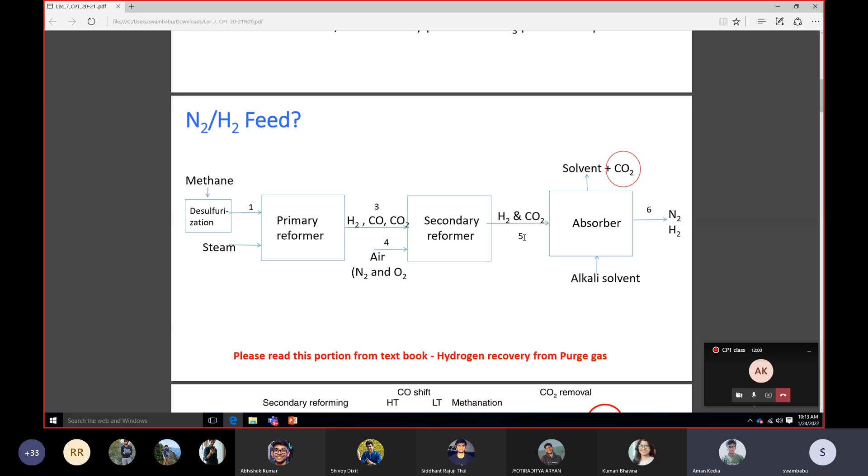Because we can easily recover CO2 from the alkali solvents. So if for some reasons you want hydrogen gas as a fuel, you can recover this hydrogen from stream 6, because in the current generation, especially in the last 6 months or so, Government of India is highly focusing on hydrogen fuels. Even abroad, many countries like Australia, Europe, America are only using hydrogen-based fuels, starting from street lamps to almost big usages. So if you want to recover hydrogen from stream 6, we can use certain adsorption processes, and in the textbook which I gave you, the details are given. You may please read the hydrogen recovery from the purge gases, or stream 6.

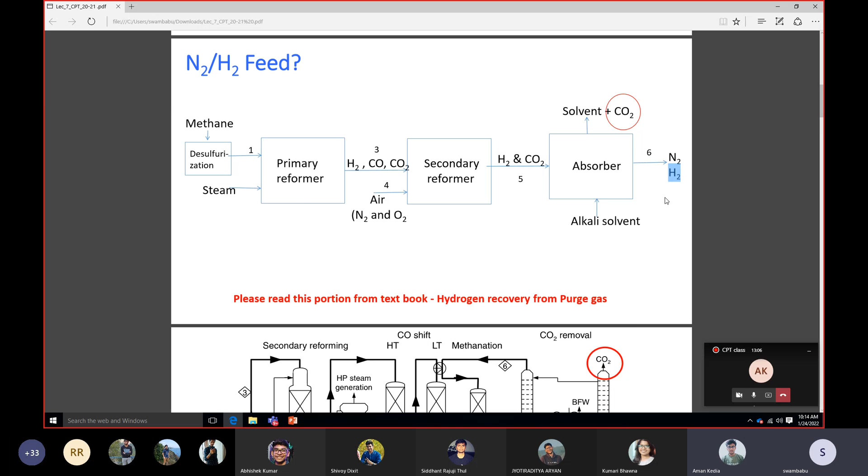So this is the overall process starting from natural gas reforming to the final ammonia production that this flow sheet contains. Natural gas, you can see the bottommost stream goes in, this is stream number 1. The first one is desulfurization taking place. Then it goes to the primary reformer, then to the secondary reforming section. After that, we have the CO2 removal. Then whatever nitrogen and hydrogen is coming, that goes to the reactor, then recycled. So this is whatever explained in bits and pieces, all together given as this flow sheet. You may get confused if you see the big flow sheet, but I have already explained it in small pieces. If you understand that, that will be sufficient to understand this.

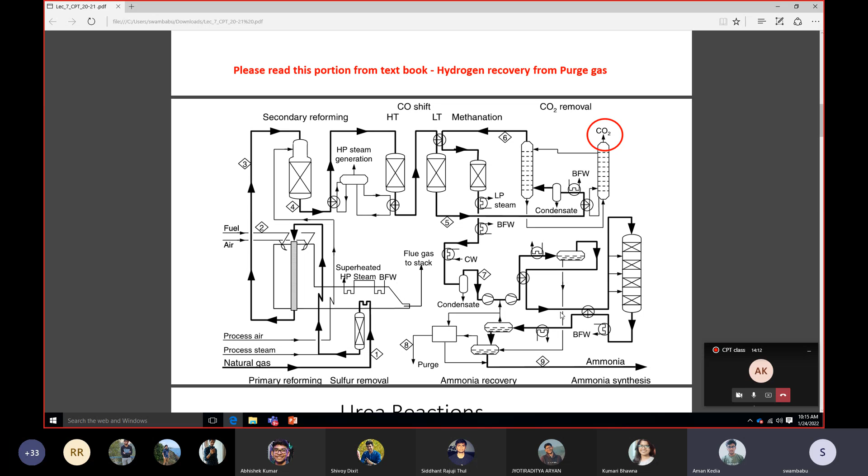So today I'll move on to the urea production. Today we'll move on to urea production. I'm sure you already know the basic chemistry behind urea.

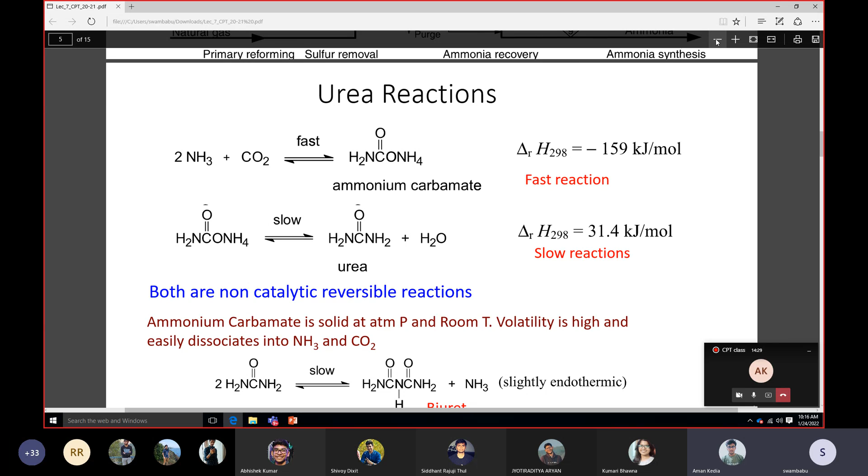In urea production, there are two reactions. In the first reaction, 2 moles of ammonia reacts with carbon dioxide, which is a very fast, almost quick reaction, and converts to ammonium carbamate. This is an exothermic reaction.

In the last class, I explained that whenever we have an exothermic reaction, if it is a catalytic reaction, we need very high temperatures, like above 500 Kelvin. If it is not a catalytic reaction, we don't need to go to high temperatures like 500 Kelvin or 700 Kelvin. Why do we need high temperatures for catalytic reactions? Any guess from the students? I mentioned this in the last class, but I just want to see whether anyone understood or not. To activate the catalyst - very good. To activate the catalyst, we have to operate at high temperature.

I have also given two other reasons why we cannot use ammonium carbamate as a fertilizer. Please understand: this is a fast reaction, this is a slow reaction. Ammonium carbamate dissociates into ammonia and CO2 at normal pressure and temperature conditions because it is highly volatile.

Now, there is another possible side reaction. Ammonium carbamate can convert to urea and water, but there's also another possible side reaction where urea converts to biuret and ammonia. This is also an endothermic reaction.

We want the second reaction to happen - we want urea formation. We don't want this side reaction to happen. We want the first reaction to happen, but we don't want the backward reaction to happen. So what is to be done?

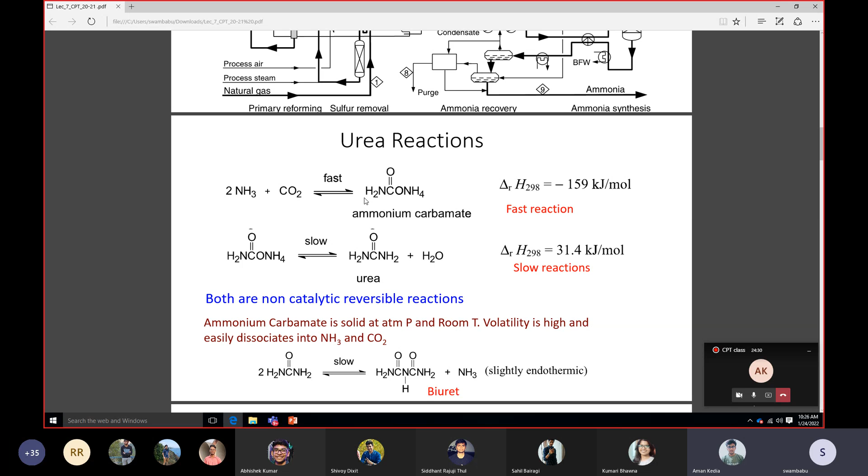In the urea reactor, we should avoid the backward reaction of the first reaction - that is, we don't want dissociation of ammonium carbamate into ammonia and CO2. We want the forward reaction of the second reaction - ammonium carbamate converting into urea and water. Again, we don't want urea converting into biuret formation. So how to deal with this?

Before this, the question comes: can we use ammonium carbamate as fertilizer? The answer is no. Why? It is a volatile component and it releases heat. If you put ammonium carbamate as a fertilizer, rather than being utilized, it will burn the plants, because it's highly volatile, dissociates into ammonia and CO2, and releases heat that burns the plants.

What are the other problems with ammonium carbamate? As I said, the first reaction needs to be operated at low temperatures because high temperatures favor the backward reaction.

What problem happens if you operate at low temperatures? Ammonium carbamate is a solid at atmospheric pressure and room temperature. It tends to form as a film if you operate the reactor below its melting point temperature.

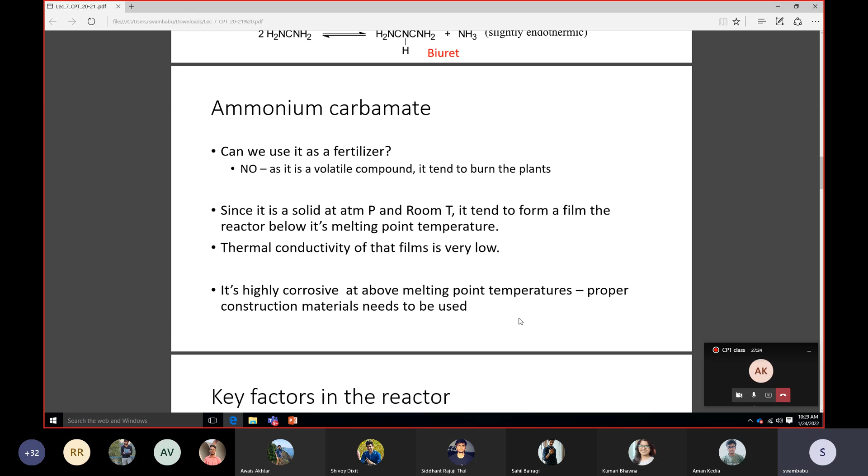So these are the solutions to these problems. The ammonium carbamate reaction, the first reaction, although favorable at low temperatures, cannot be operated at very low temperatures because ammonium carbamate tends to form a film. The thermal conductivity of that film is very low, so it will not be possible to do intermediate cooling. If you operate at high temperatures, two problems arise: the backward reaction is favored, and at the same time ammonium carbamate can be highly corrosive. So there has to be an optimum temperature.

That optimum temperature needs to be run for the urea reactions. So how do we find out the optimum temperature? Again, we'll go back to the thermodynamics study to find it out.

So the key factor to be maintained in the reactor is to avoid the dissociation of ammonium carbamate. To avoid the dissociation of ammonium carbamate, the reactor needs to be operated at high pressure.

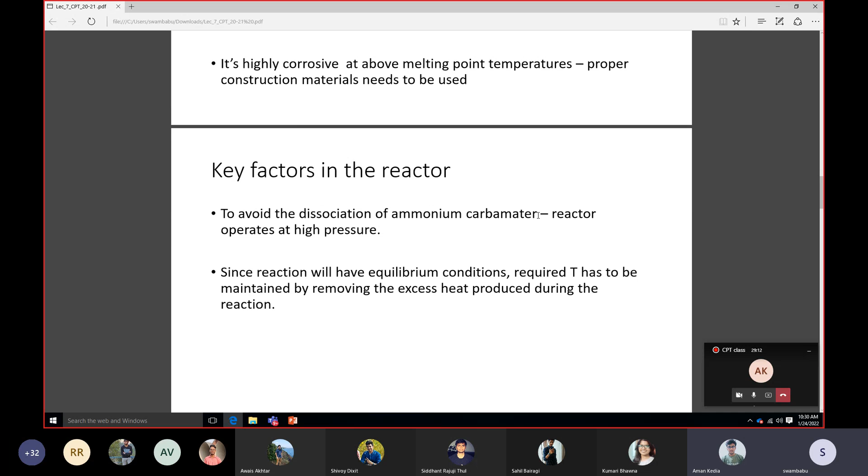Since the reaction has equilibrium conditions, where at high temperature the backward reaction is favored, we need to remove the excess heat produced during the reaction, as already discussed.

So this is from the kinetics point of view. I think first we will see this, the thermodynamic point of view. CO2 conversion in the liquid phase, where ammonia reacts with CO2, both happening in the liquid phase.

Now you can see that the optimum temperature is around 190 to 200 degrees. We cannot operate below 160 because the conversion will be very low. Again, we cannot operate above 210 degrees centigrade because the backward reaction is favored.

This is from the thermodynamic equilibrium studies, which clearly indicate that it is ideal to use between 190 to 200, but we can use between 170 to 200 conditions. So normal urea reactors operate between 170 to 200 degrees centigrade, and at this range, the approximate CO2 conversion achieved is around 70%.

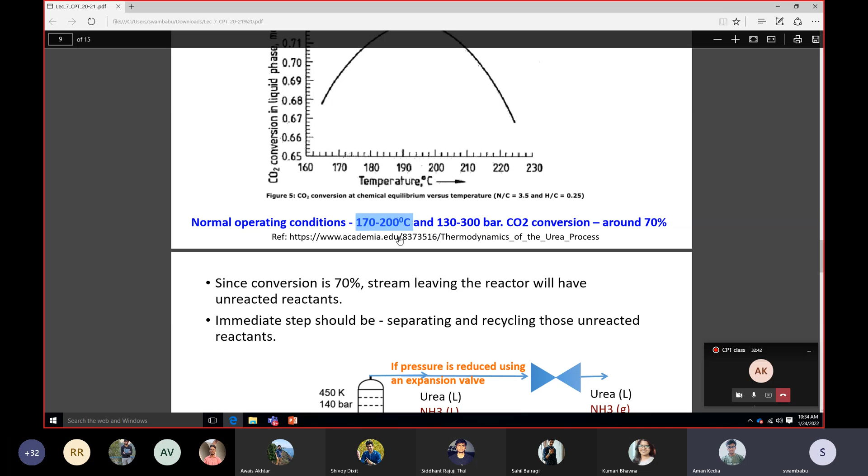So even from this graph, the favorable conditions are again 170 to 200 degrees. Even from CO2 conversion to ammonium carbamate and carbamate to urea, both show that the normal operating temperature has to be 170 to 200 degrees centigrade. Close to 200 is always better.

And to avoid the dissociation of ammonium carbamate back to ammonia and CO2, we need to run at high pressures. So we operate at 130 to 300 bar pressure.

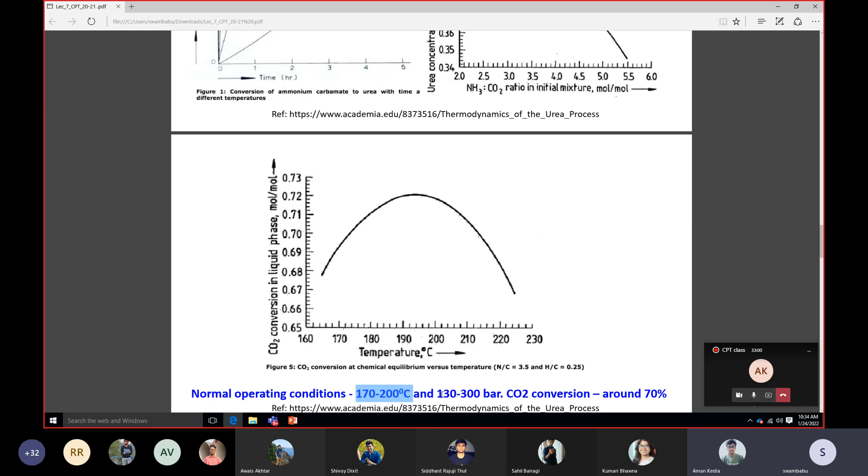Now, at what ratio? Ideally, from the reactions, we wanted a 2:1 ratio. Now, which is the limiting reactant here? CO2 is the limiting reactant. Usually in the urea reaction, CO2 conversion limits the reaction.

So now, if you want to avoid the backward reaction, what do we have to do? Can anyone guess? If I increase the mole ratio or decrease the mole ratio, I can avoid the backward reaction.

Let me say, here we need a 2:1 ratio, but usually we operate at higher ratios. NH3 to CO2 stoichiometric required ratio is 2, but we operate slightly higher, at around 3. The reason is if I maintain ammonia in excess,

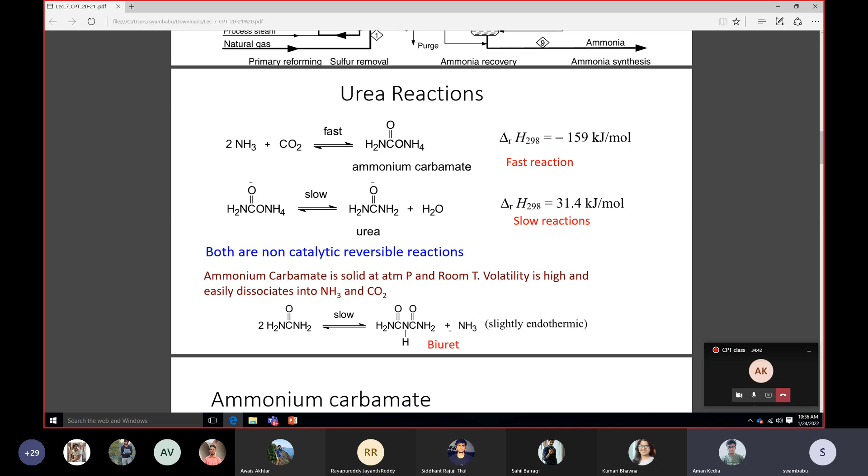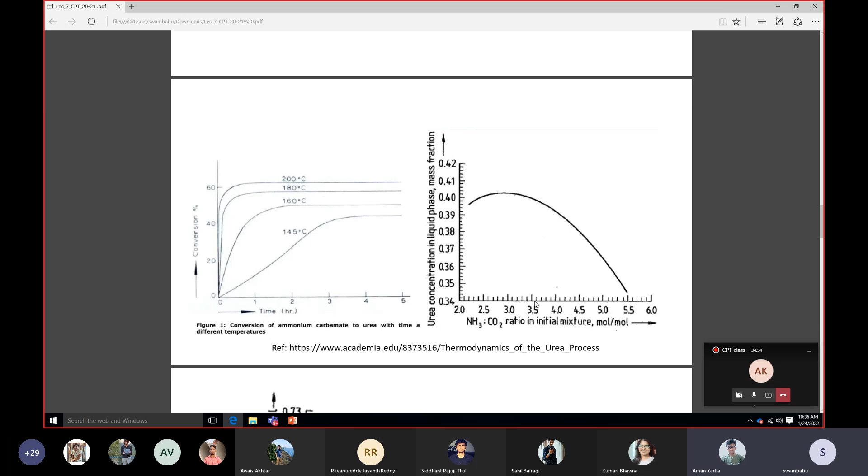I can avoid the backward reaction. Also, I can avoid this biuret formation. So that is the reason another important thing we do: we input more amount of ammonia than the stoichiometrically required ammonia.

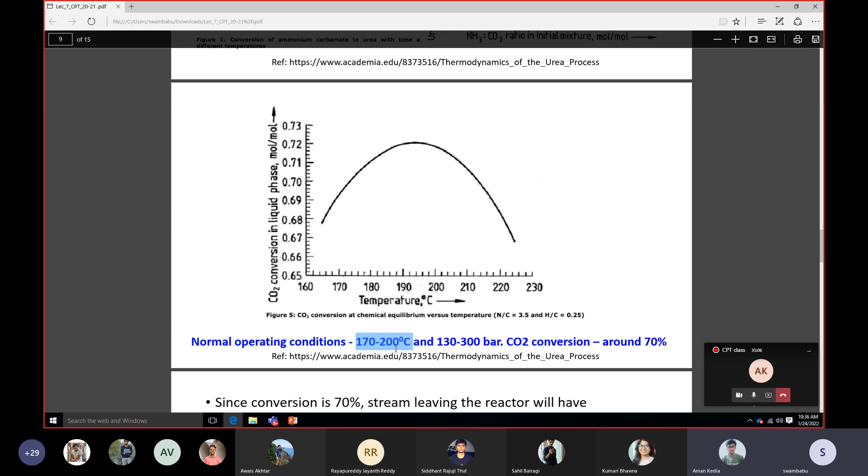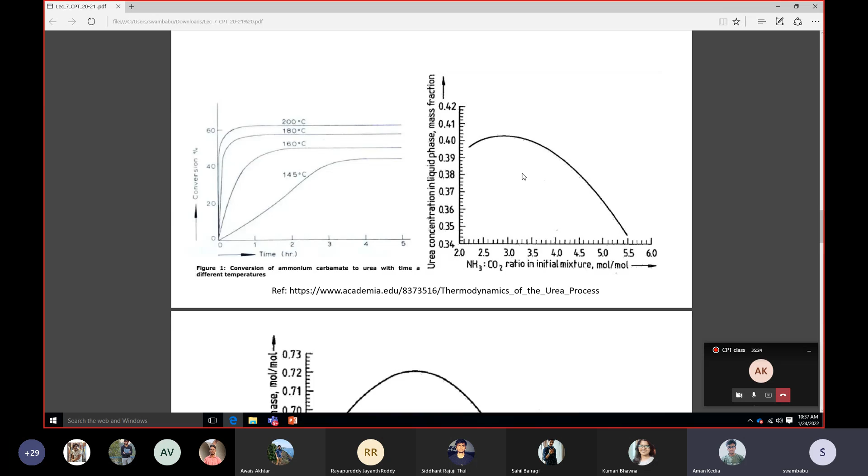So from thermodynamics and kinetics point of view, we need to operate at 170 to 200 degrees centigrade and at high pressure, and to avoid biuret formation and push the first reaction in the forward direction, we supply slightly excess ammonia than the stoichiometrically required amount. I hope students were able to understand.

Since there are no comments, I assume you all were able to understand.

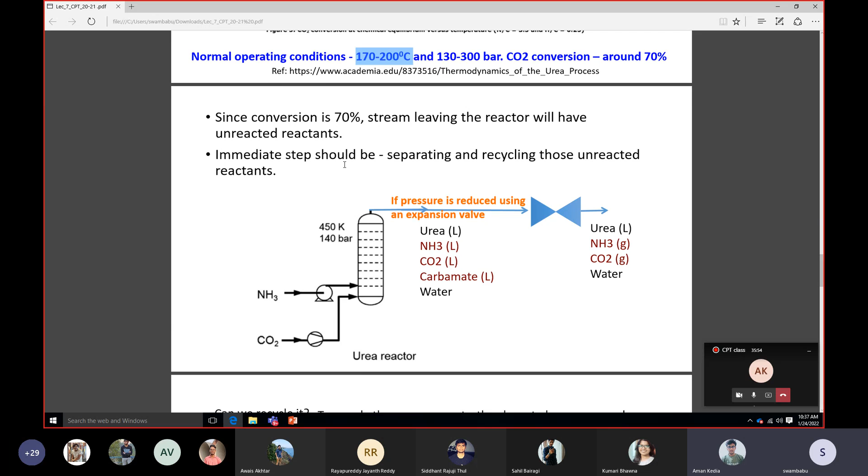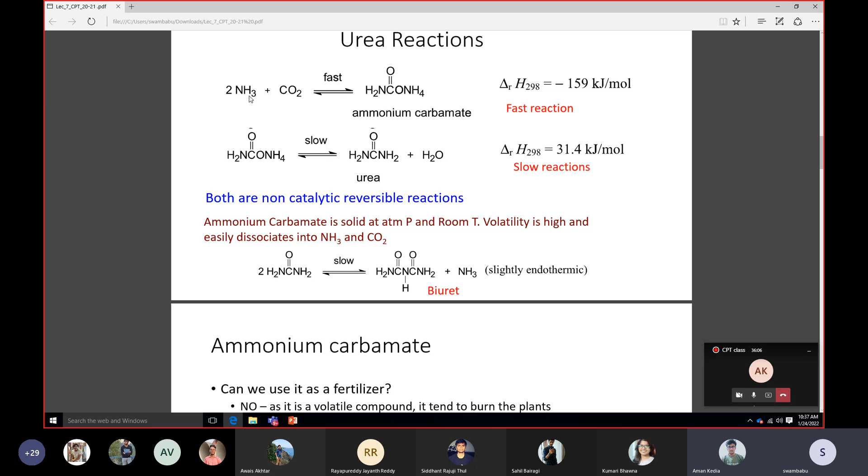Now, as we can see, this is a non-catalytic reaction. This is a liquid phase reaction. Ammonia and CO2 are liquefied before we send them to the reactor.

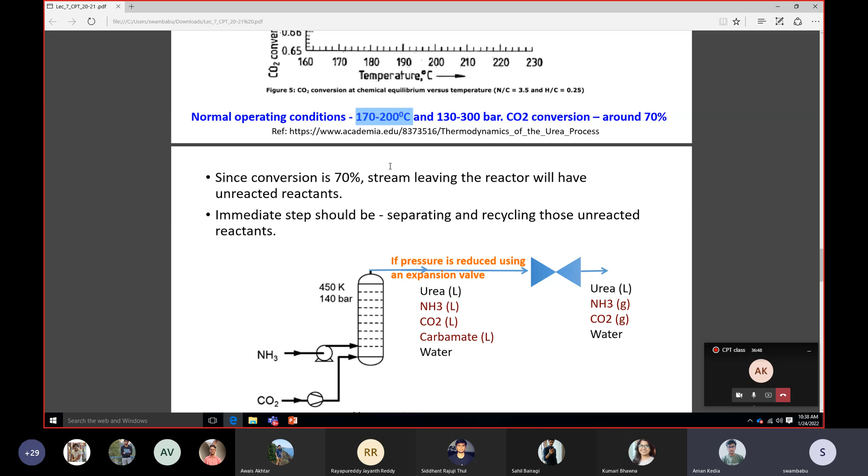What reactor can be used? Can anyone guess, students? Reactants are in liquid phase, it's a non-catalytic reaction operated at 170 to 200 degrees centigrade and high pressure. What reactor is best in this case? What reactor do you suggest?

Okay, let me ask. What reactors are available to us from CRE or whatever I discussed in the unit operations, unit process class? First one is CSTR. Second one, PFR.

These two reactors, CSTR and PFR, are used for what type of reactions? For non-catalytic reactions, right? Simple CSTR and simple PFR are used for non-catalytic reactions.

For catalytic reactions, solid catalytic reactions, what reactors can we use? Packed bed reactor, very good. Any other reactors? Fluidized bed reactor, packed bed reactor. Then we can also use slurry reactor. We can use trickle bed reactors. Those are the 4 catalytic reactors.

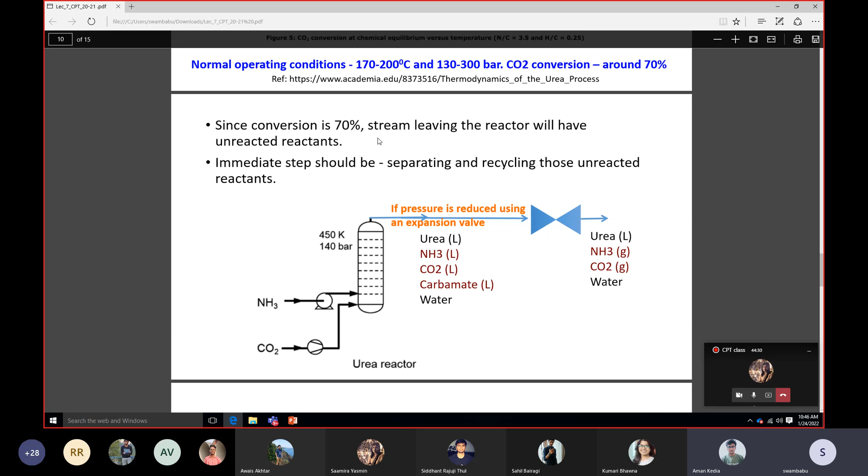What will be there? Unreacted ammonia and unreacted CO2, both in liquid phase. Unreacted ammonium carbamate will be there, and urea will be there, and water will be there. So all these four components will be there. Now from the thermodynamic data, we can see the conversion is around 70%.

So now, whenever the conversion is less than 100%, what do we need to do? Unreacted reactants need to be separated. Now in addition to unreacted reactants, ammonium carbamate is also there.

What is the pressure here? The pressure of the stream leaving the reactor is around 140 bar. So how do we convert this carbamate into unreacted reactants? Unreacted reactants are ammonia and CO2.

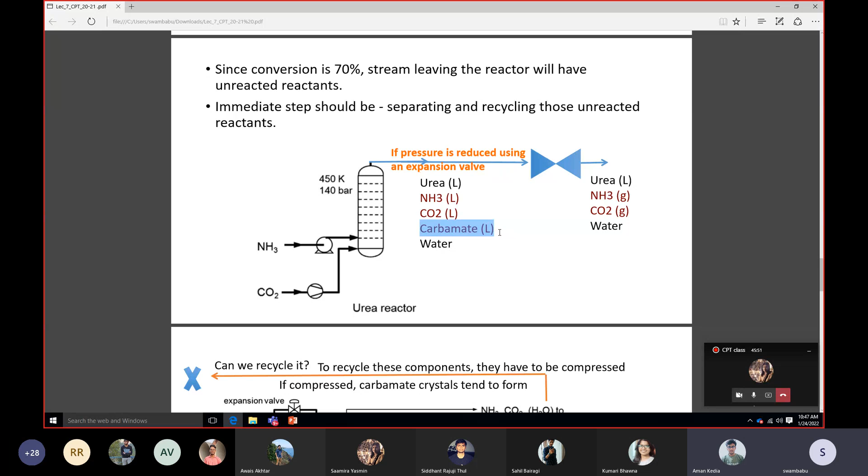How do we convert ammonium carbamate into ammonia and CO2? Any guess from the students? I gave a hint already. How do we convert ammonium carbamate into ammonia and CO2?

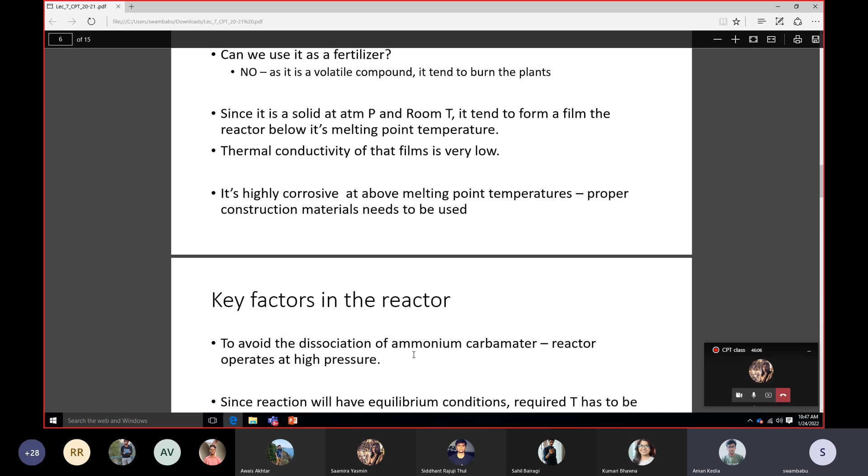Ammonium carbamate dissociates into ammonia and CO2 at atmospheric pressure. You can see here, ammonium carbamate is solid at atmospheric pressure and room temperature, volatility is high, and it easily dissociates into ammonia and CO2.

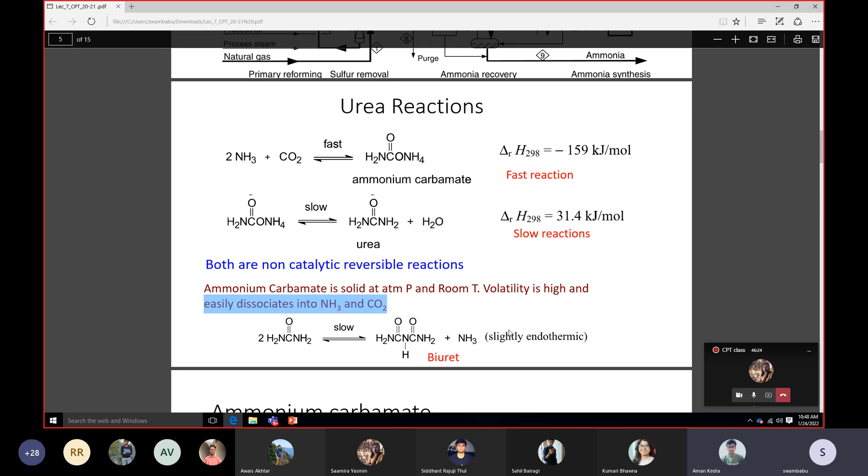So how do we convert this unreacted carbamate into ammonia and CO2? By releasing the pressure. At this point, the pressure leaving the reactor is at 140 bar. If we reduce the pressure from 140 to atmospheric pressure using a pressure reducing valve, an expansion valve, this expansion valve is very special.

We will not reduce pressure from 140 to atmospheric suddenly. If you reduce it suddenly, a very high amount of mist formation will be there, very high amount of byproduct formation will be there. That's why the pressure has to be released very slowly, gradually, using a very controlled pressure releasing valve called an expansion valve.

While this, urea is a stable product - once it's converted to urea, it will not dissociate into ammonia and CO2. Only carbamate can be easily dissociated. So after releasing this pressure, the stream will contain urea, ammonia, and CO2.

And we have water. Now, at atmospheric pressure and atmospheric temperature, urea will be in the solid form - of course here we haven't reduced the temperature yet. But at 450 Kelvin, urea will be in the liquid form. Since the pressure is atmospheric, ammonia will be in the gas form and CO2 will be in the gas form.

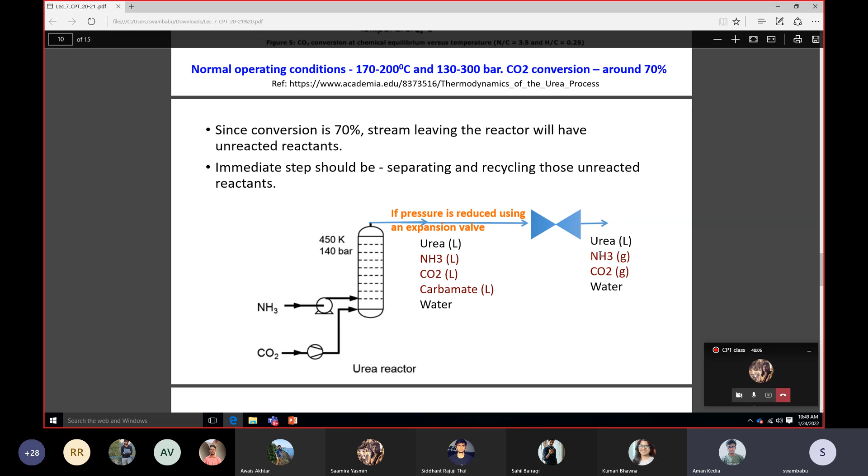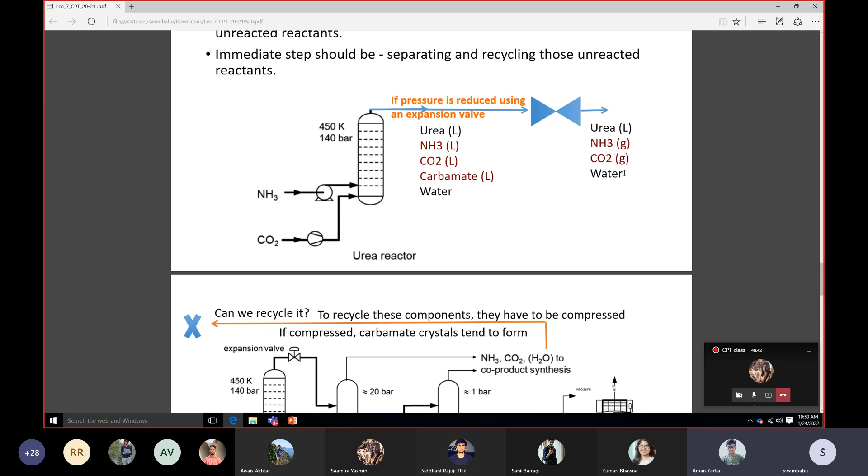Since these two are gases and this is liquid, we can easily separate gas and liquid, and these unreacted reactants can easily recycle back. The gases, ammonia and CO2, can be easily recycled back because they turn from liquid state to gaseous state, while urea and water remain in the liquid state. So the separated gases can be recycled back.

So this is the process flow sheet.

You can see here, liquid ammonia from the ammonia production process is pumped into the urea reactor. CO2 is compressed and sent as a liquid to the ammonia urea reactor. Now these reactors operate at 140 bar pressure and 170 to 200 degrees centigrade.

After the reaction, we use an expansion valve. This expansion valve gradually reduces the pressure. So instead of straight away going to 1 bar pressure, using this expansion valve, the pressure is reduced from 140 bar to 20 bar.

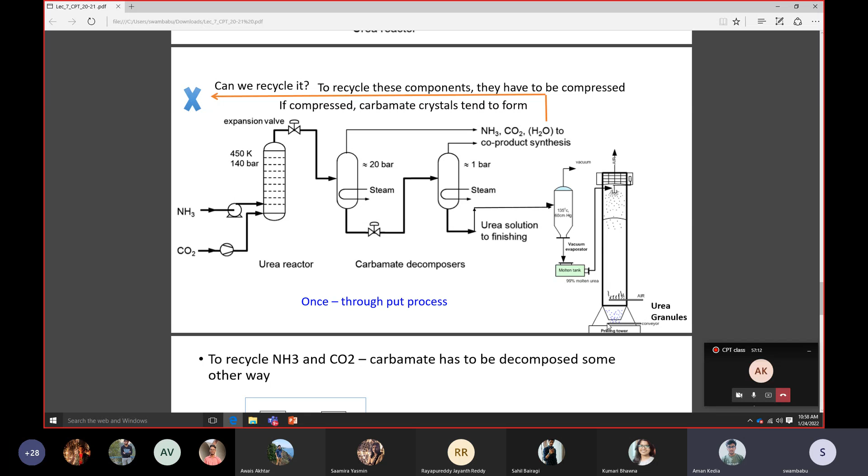Now, an important question comes here: can we recycle this unreacted ammonia and CO2? The problem is, if we want to recycle ammonia and CO2, they need to be pressurized, because the CO2 is pressurized to go into liquid CO2, and ammonia also needs to be pressurized because it has to be sent as a liquid.

Now, if you individually, separately pressurize them, no problem. But if you pressurize ammonia and CO2 together, there is a high chance of carbamate crystals forming. Ammonia reacting with CO2 forms carbamate. So if you pressurize them together, there is a high chance of carbamate crystal formation.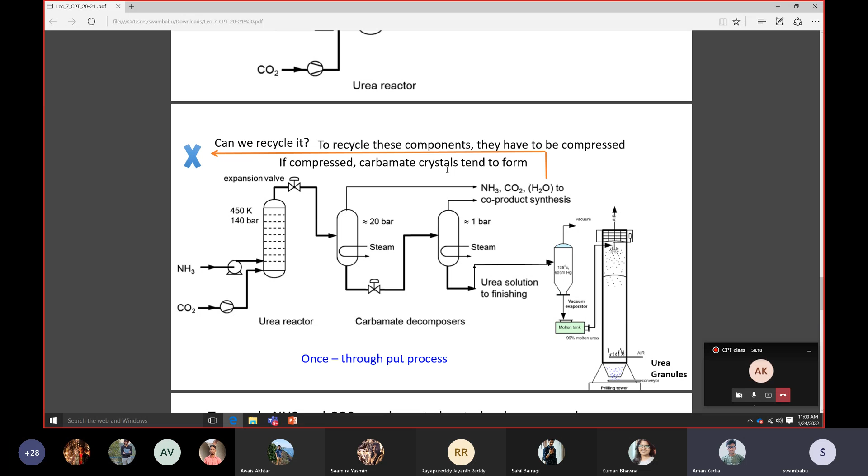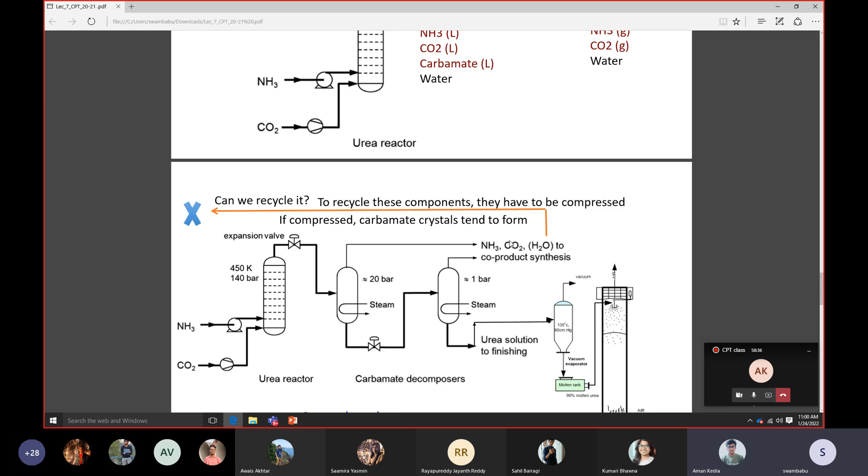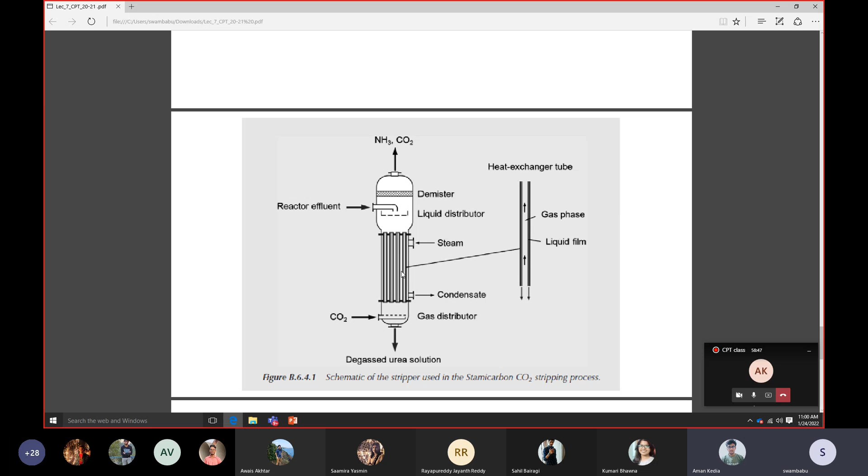Or there is another way that I will discuss, because it's already 11 o'clock, so we will discuss that in the next class. So this is the typical reactor, CO2 stripping reactor, and as I said, a plug flow reactor type is used. We'll continue from here in the next class.

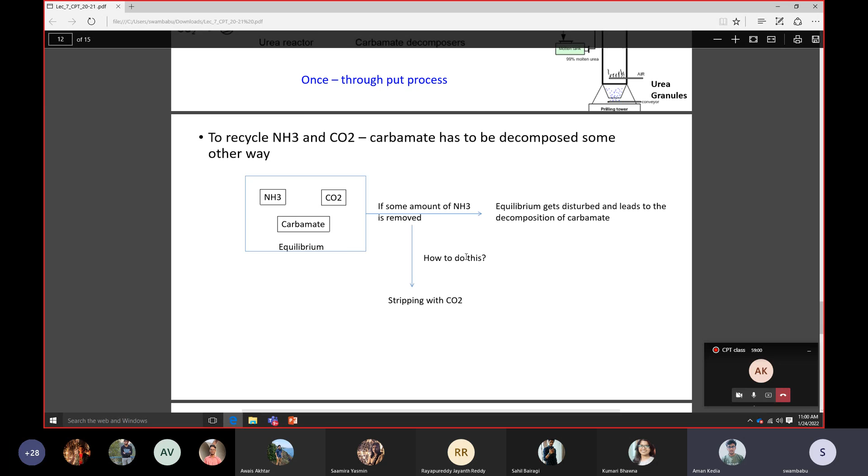It's already 11 o'clock. How to recycle? What is the way to recycle? That we will see in the next class.